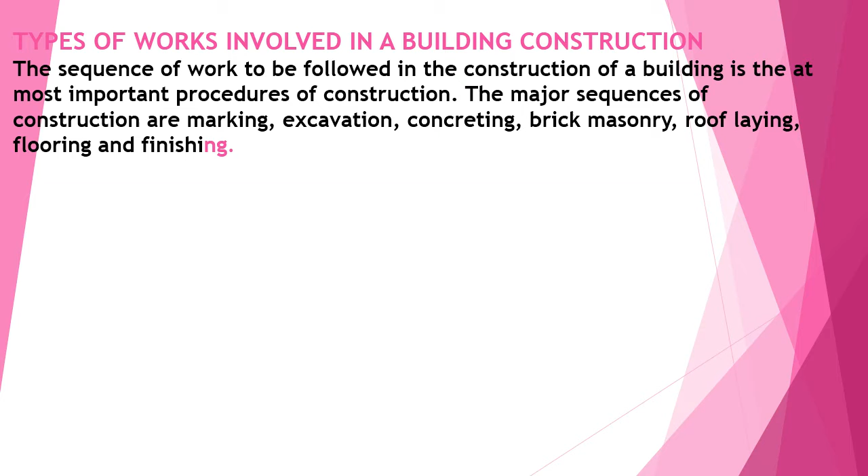The sequence of works to be followed in the construction of a building is the most important procedure of the construction. The major sequence of construction are marking, excavation, concreting, brick masonry, roof laying, flooring, and finishing.

Paperwork. Development of a private structure requires desk work before the beginning of real development. The paperwork includes readiness of drawings, estimation of material cost, work cost and possibilities, and endorsement of the drawing from the city development authorities or the concerned municipal authorities.

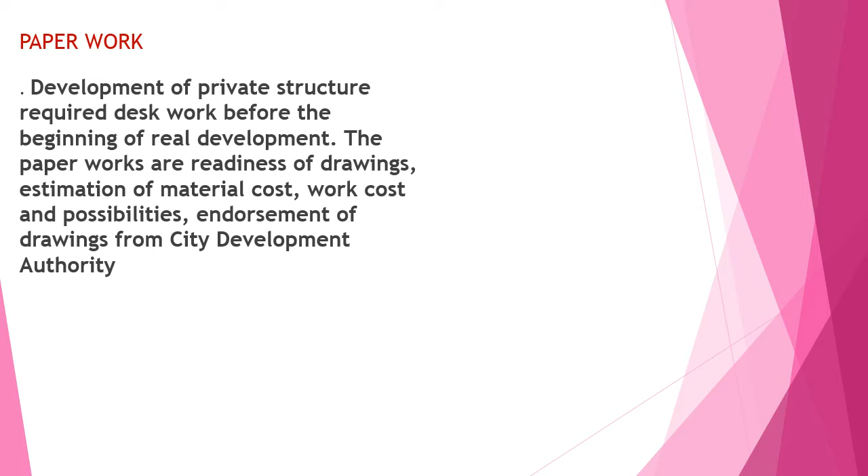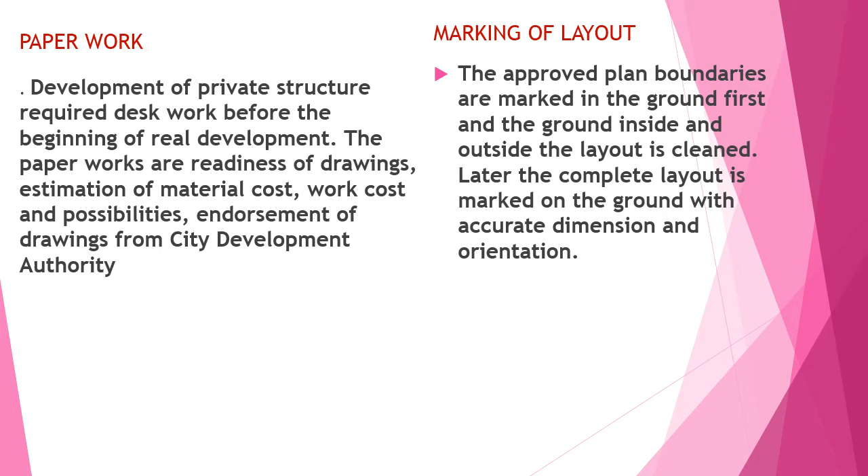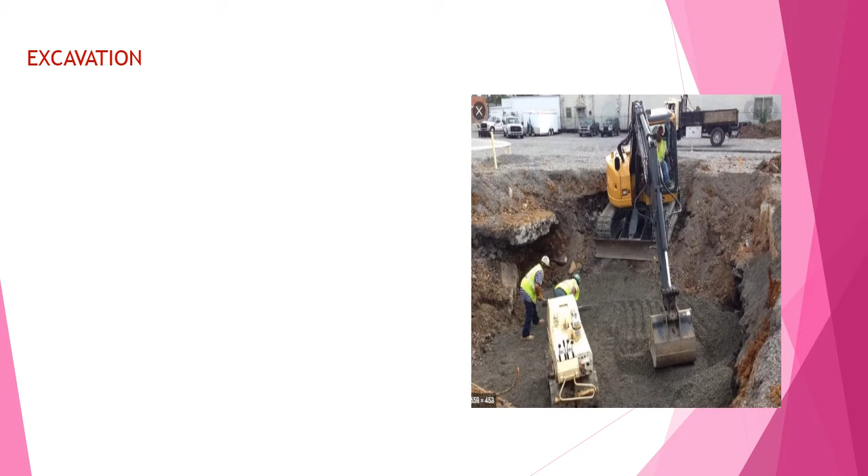Excavation. Generally, excavation is carried out for the construction of wall foundations. Excavation should be carried out as per the drawings defined with the lengths and widths. Suitable machines are used to excavate the earth for making the foundation. The adjoining image shows the equipment involved in the excavation.

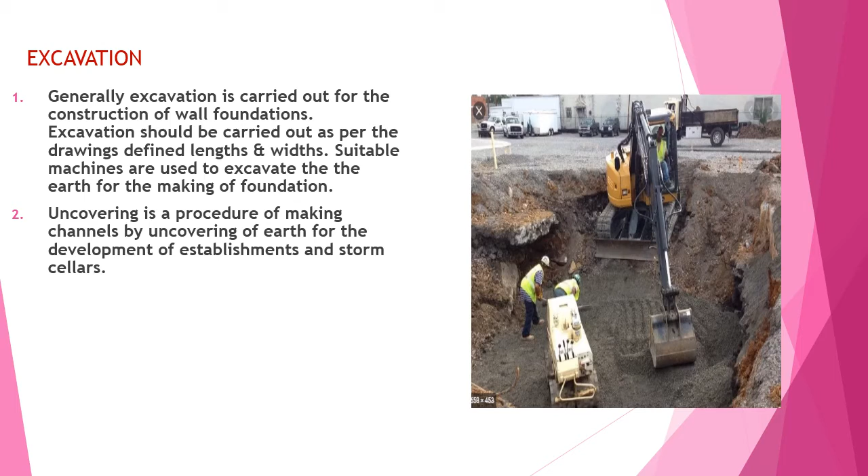Excavation is a procedure of making channels by uncovering the earth for the development of foundations and basements. Excavation is finished using a JCB or a backhoe. After the excavation, the surface is leveled, called surface dressing.

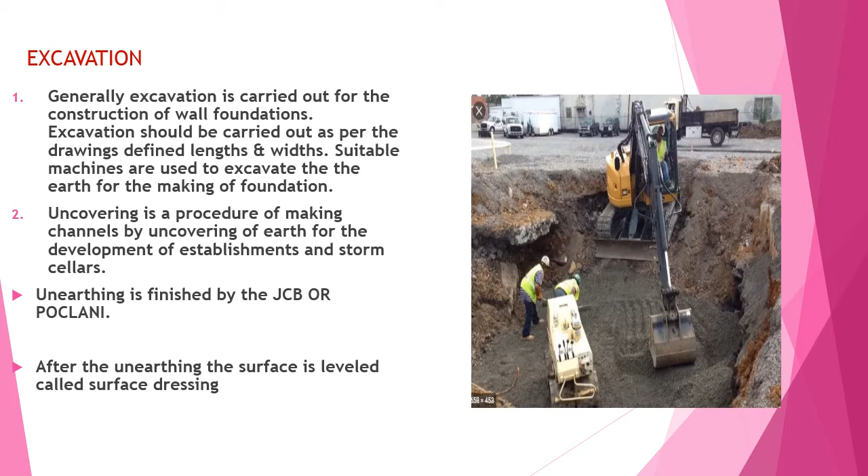Foundation work. Foundation work consists of many sub-works, which are as follows: compacting the ground. Excavation pits are trimmed and dressed as per requirement, and the bottom is compacted using hand compactors.

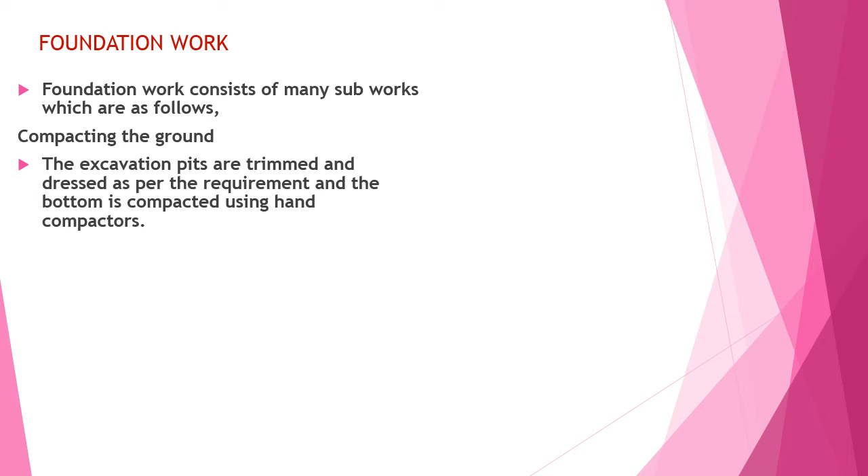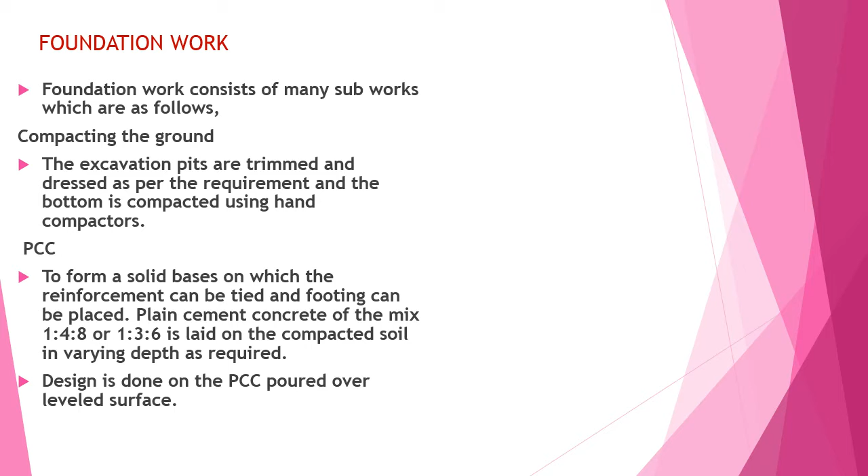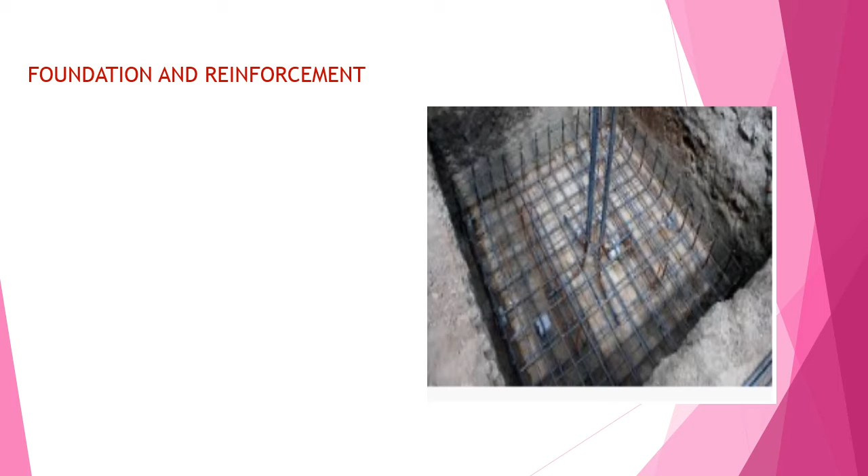Foundation and reinforcement. The adjoining image shows how the reinforcement has been tied for the foundations. Steel bars are integrated and put on the PCC, forming a skeleton in which the concrete is poured, and the column poles are taken from there. Foundation steel is then laid as per the drawings.

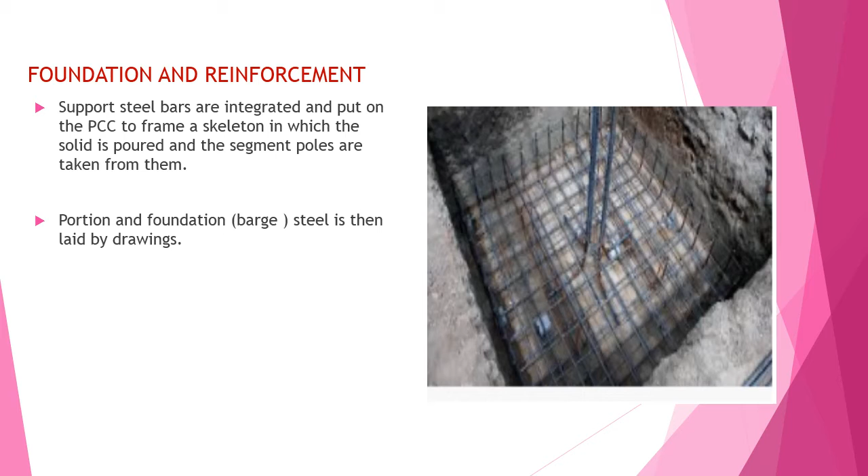Formwork. To obtain the concrete in the proper shape, desired shape and length and level, formwork has to be done. This is to be done as per the drawings.

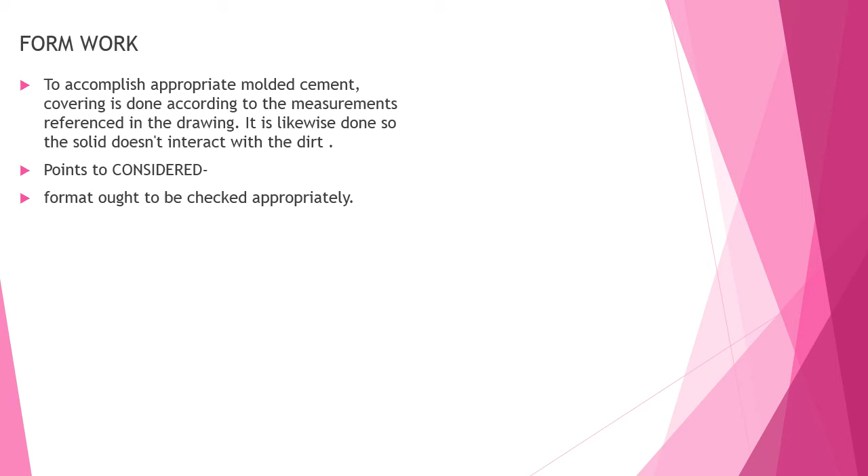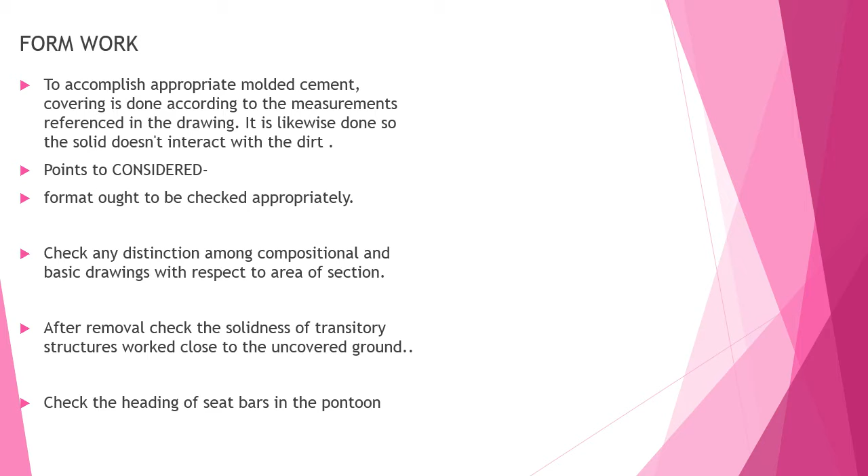Points to be considered in the formwork: the format has to be checked properly. Check any distinction among compositional and basic drawings with respect to the area of the section. After removal, check the solidness of temporary structures built close to the excavated ground. Check the heading of the bars in position. You can see the images which show how the reinforcement is tied inside the formwork.

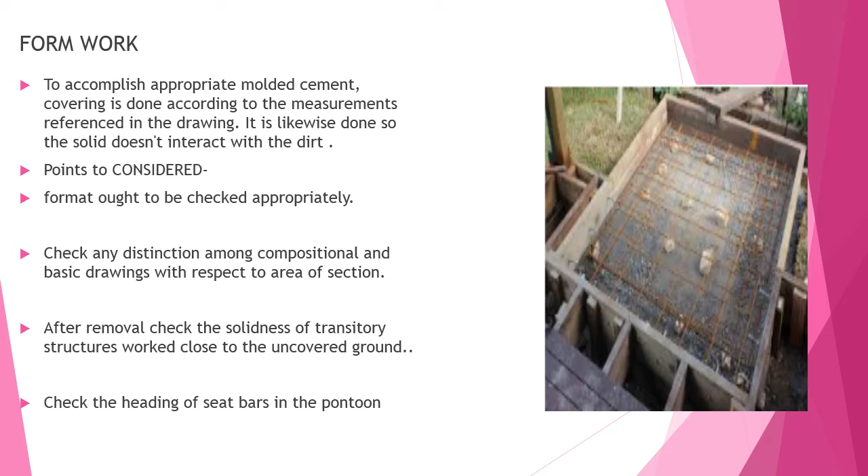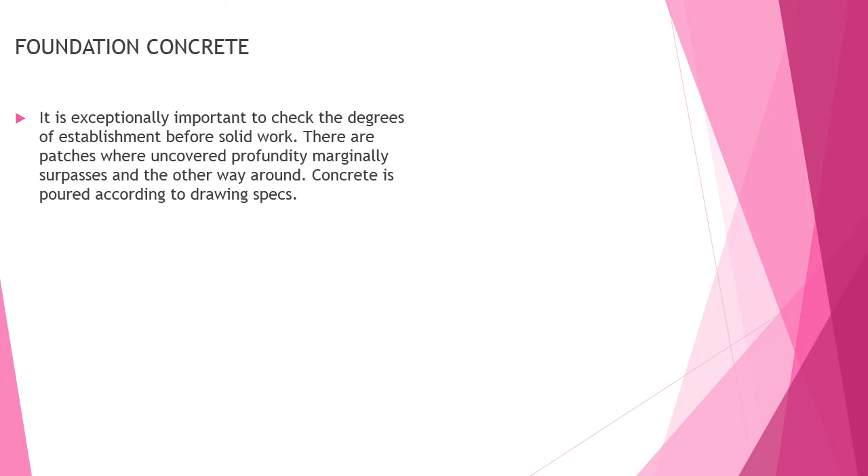Foundation concrete. It is important to check the levels of the foundation before the concrete work. There are patches where excavation is marginally deeper or shallower than required, vice versa. Concreting is poured according to the drawing specifications. This is the image of how the foundation concreting has been done.

Column casting. Casting of columns is made by fixing the shuttering formwork, and concreting is poured inside the formwork. The shuttering is usually removed after 24 hours of casting, and curing has to be carried out for a minimum period of 7 days. And the portion of the column formwork is finished.

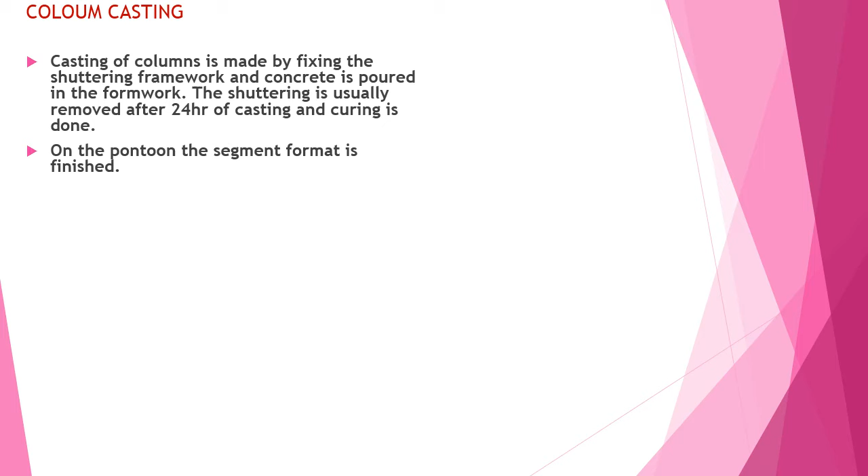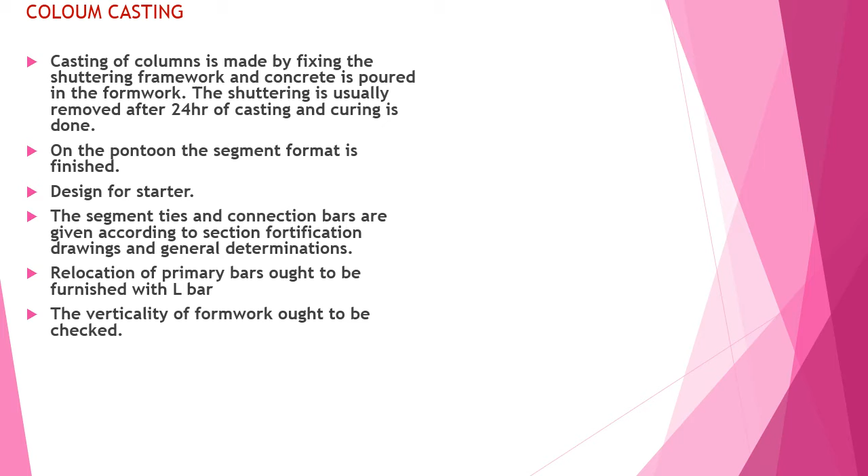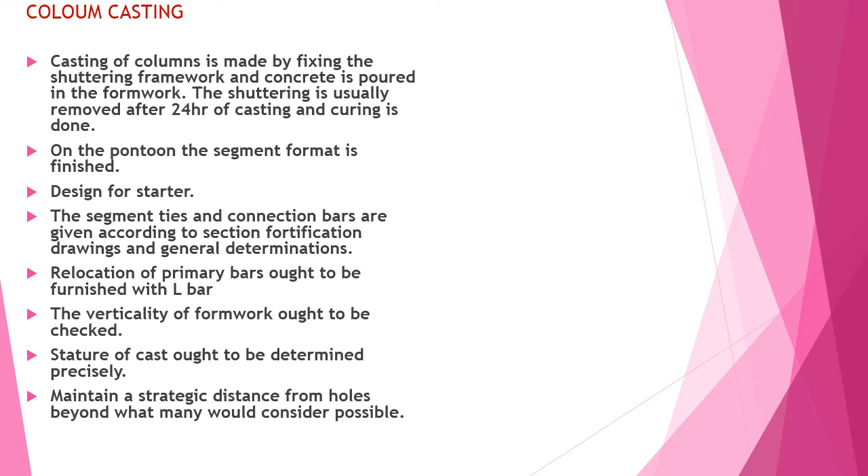Design for a starter. The column ties and connection bars are given according to the section reinforcement drawings and general specifications. Placement of primary bars ought to be furnished with L bar. The verticality of the formwork ought to be checked. Stature of cast ought to be determined precisely. Maintain a strategic distance from gaps beyond what is considered possible.

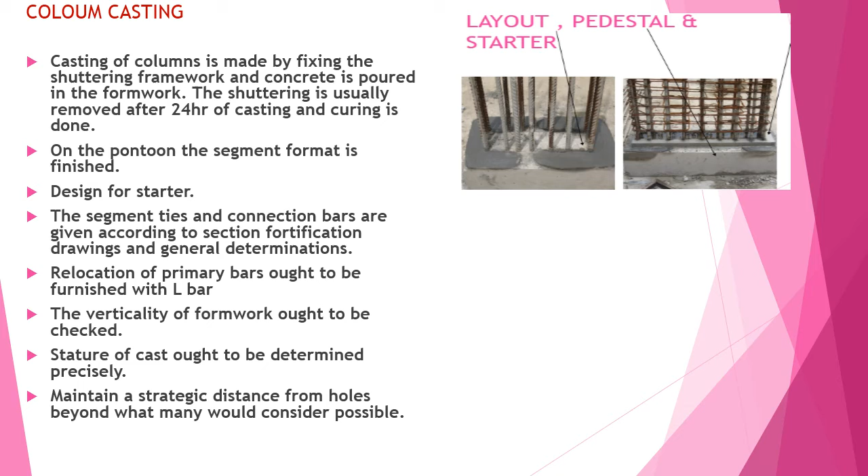This is the way a layout for a starter and pedestal has been erected. This is the way column casting has been done and cured properly.

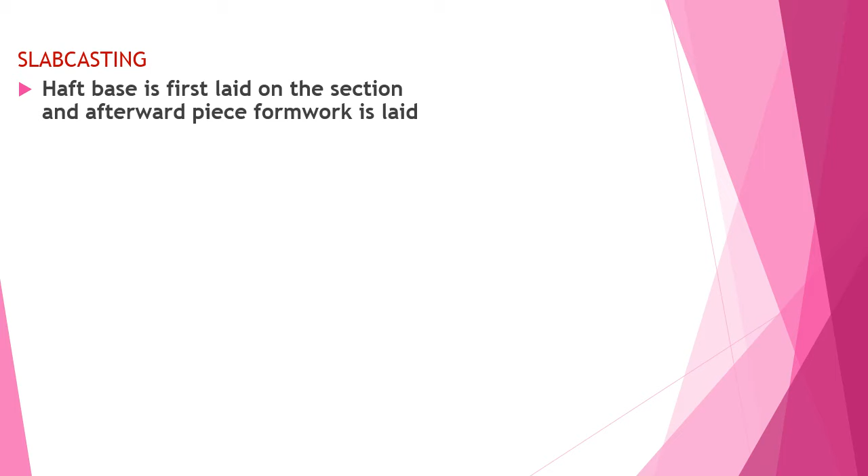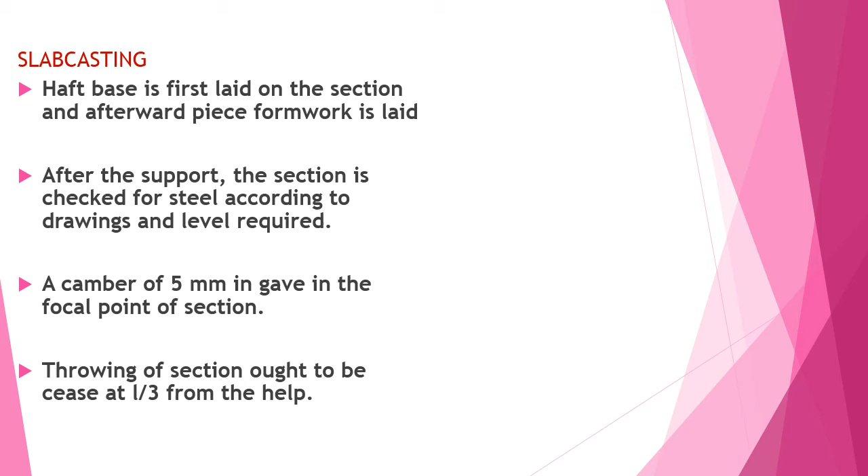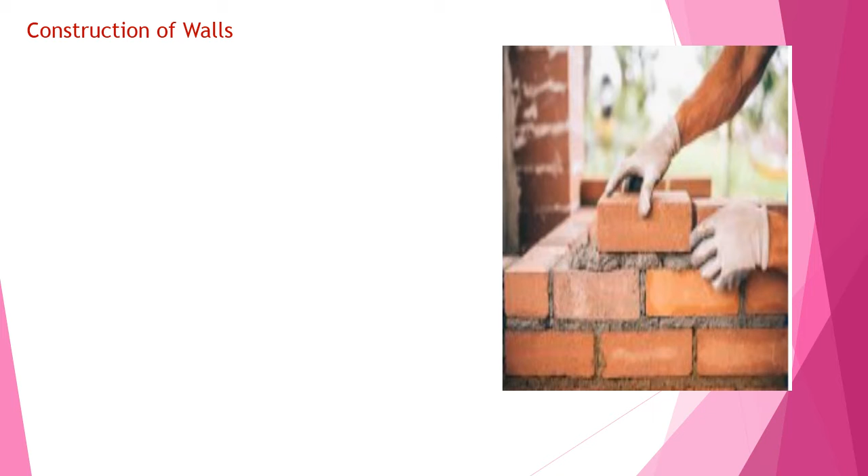Construction of the walls. Walls are constructed using many materials such as bricks, blocks, precast concreting and many others. Before starting the wall construction, the base of the wall is constructed first using concreting or size stone masonry to avoid any capillary action. The height of the wall depends upon the floor height. Necessary openings are given for doors, windows and ventilators.

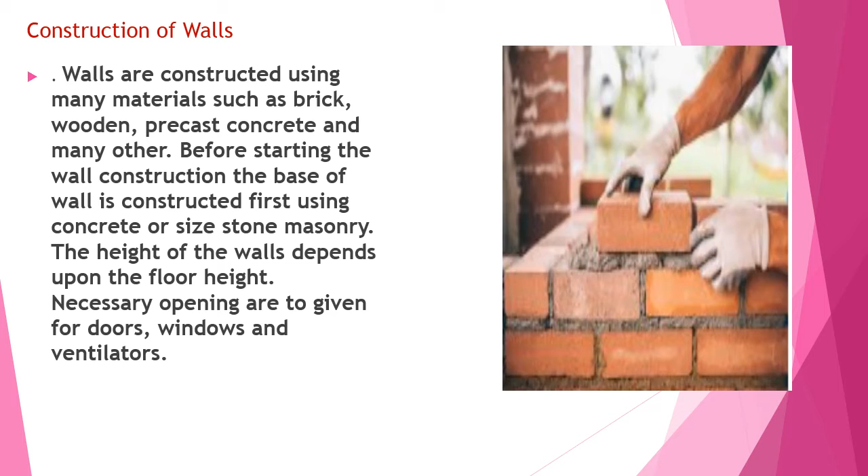Lintel beams. Masonry work of the building is carried out in one go till the roof. Openings for windows and doors are left during masonry works. Reinforced cement concrete beams are laid down on top of the opening, so that load of the structure above openings does not directly come onto the door frames. See the images which show how the lintel beams are cast on top of the doors and windows.

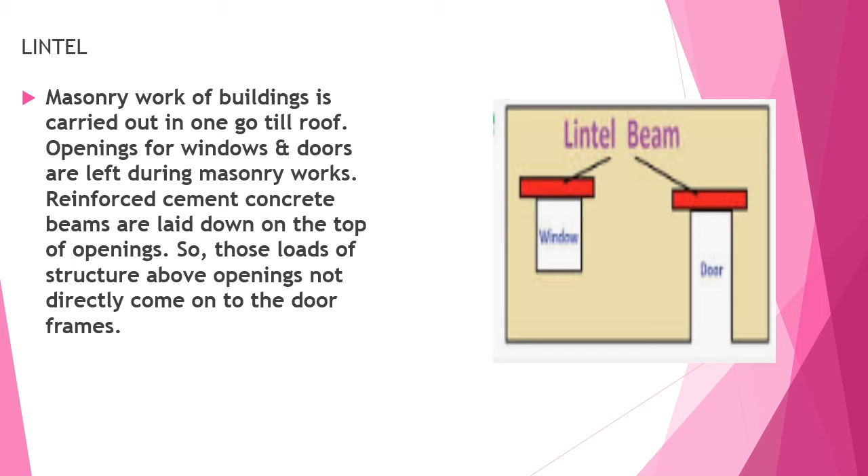Plastering. Formwork is removed after 14 days of slab pouring. Now plaster work can be started. Mortar of the plaster work can be 1:3 or 1:4. Thickness of the plaster is not more than 0.75 inch. Cure the surface for about 7 days so that the plaster gains the necessary strength.

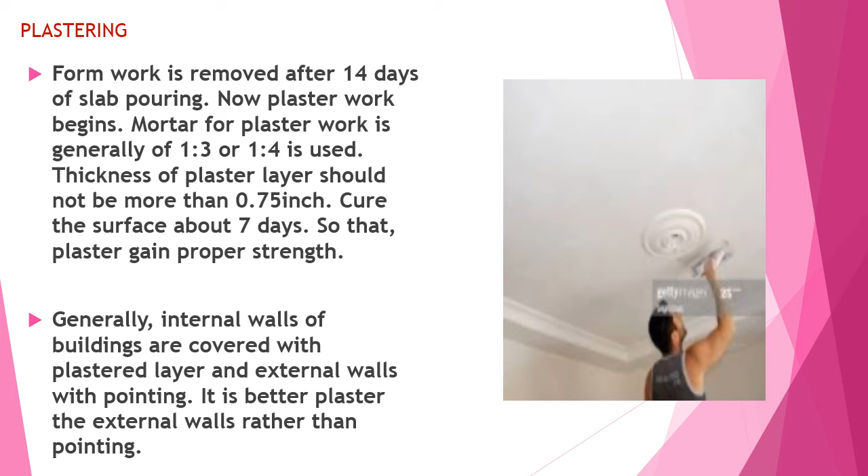Generally, internal walls of buildings are covered with a plastered layer and external walls with pointing. It is better to plaster the external walls rather than pointing.

Fixing doors and windows. Customarily, doors and windows of wood are utilized. However, steel and aluminium are also an available choice. In the case of wooden doors and windows, frames are fixed in the walls during the masonry work.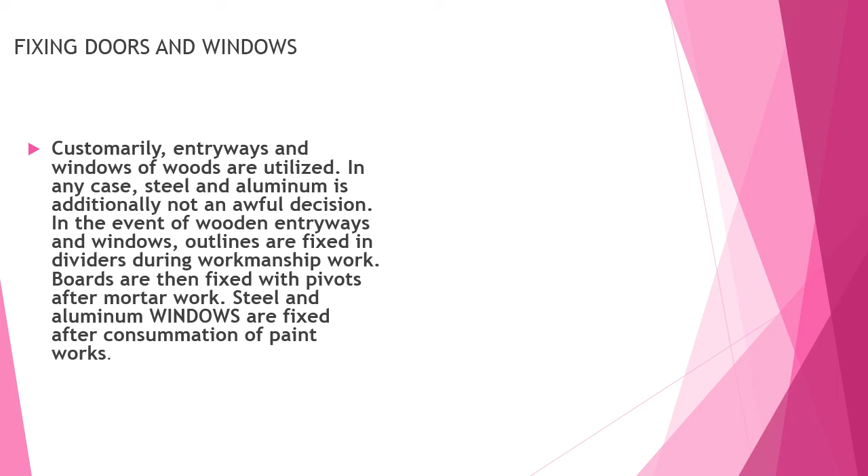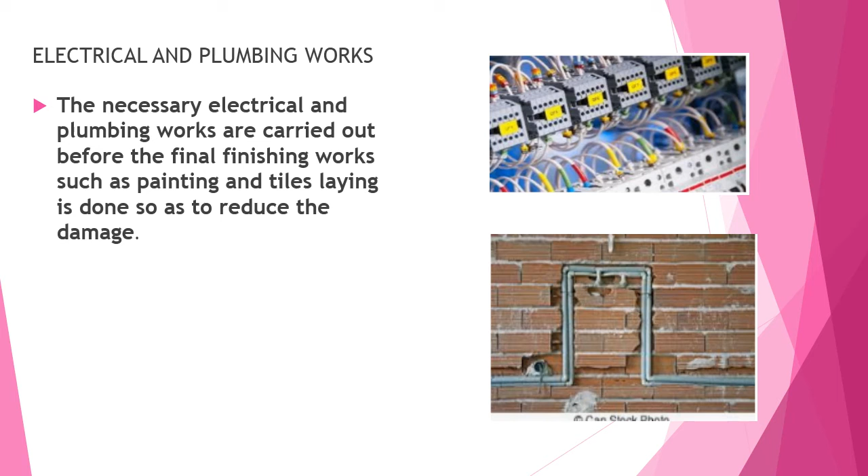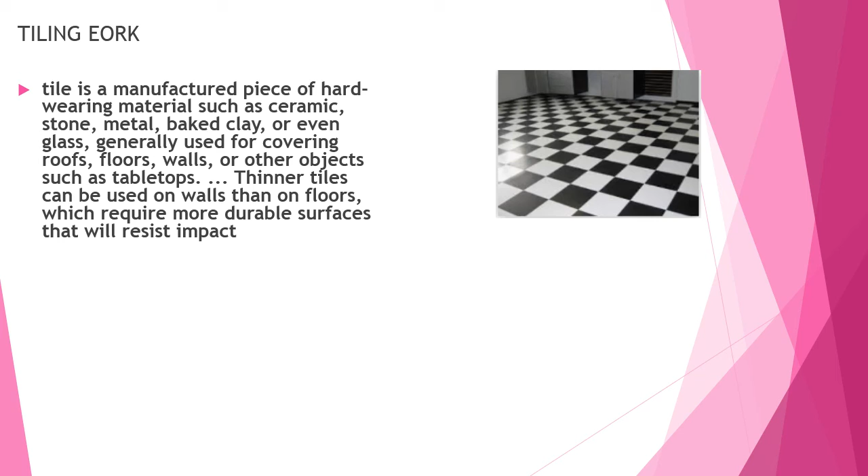Tiling work. Tile is a manufactured piece of hard wearing material such as ceramic, stone, metal, baked clay, or even glass, generally used for covering roofs, floors, walls, or other objects such as tabletops. Thinner tiles can be used on walls than on floors, which require more durable surfaces that will resist impact. Majority of tiles are laid in the bathrooms and kitchen area.

First the wall tiles are fixed, after which the floor tiles are fixed. For flooring works, granite, marble, tiles, and epoxy are also used. These images will show you how the tilings and the paver blocks are fixed in a building.

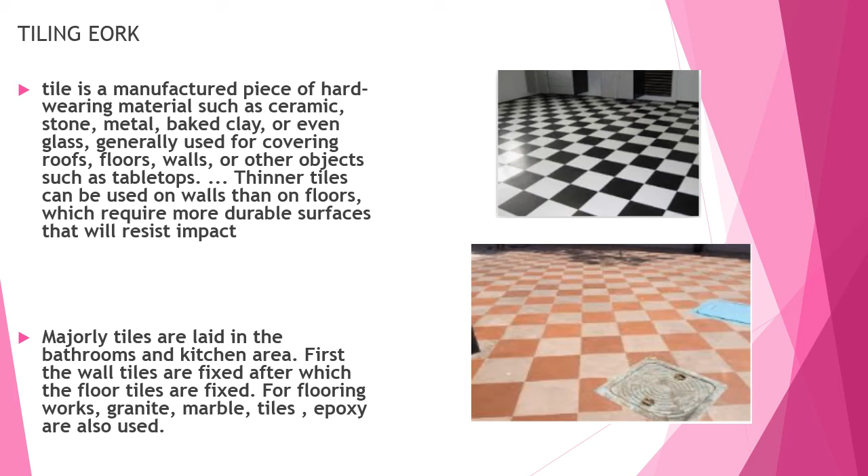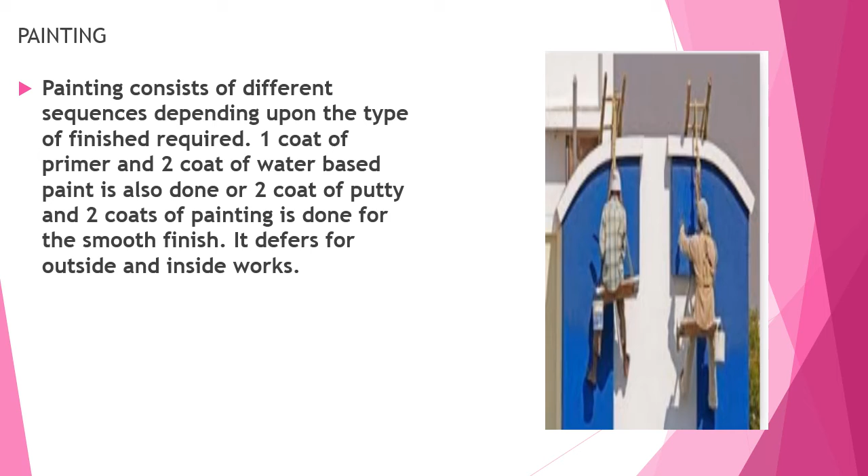Painting. Painting consists of different sequences depending upon the type of finish you require. It might be 1 coat of primer and 2 coats of water-based paint, also 2 coats of putty and 2 coats of painting. It is dependent upon the customer's requirement, and differs for outside and inside works. The images of the painting that has been carried out have been shown.

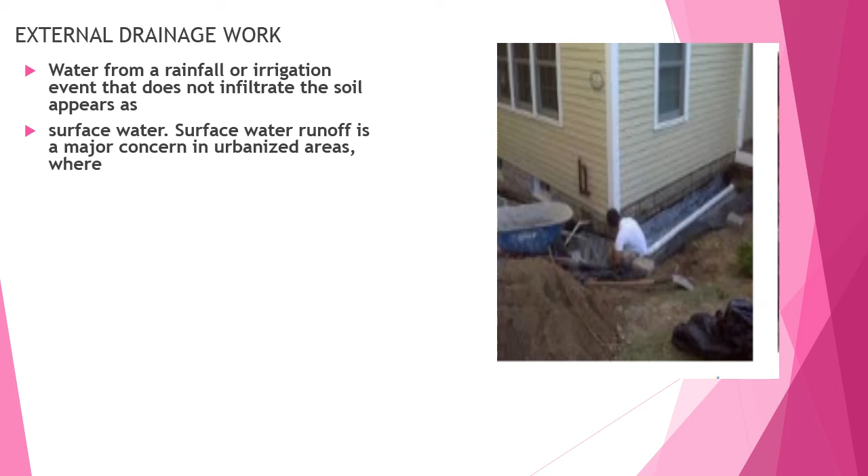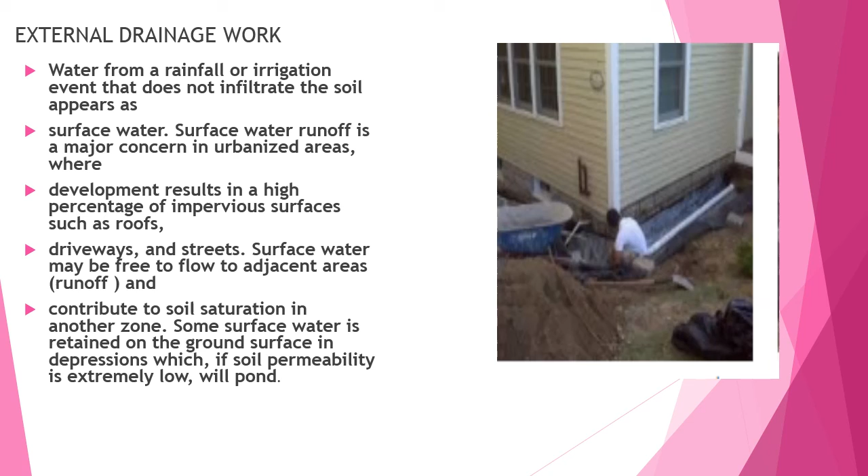External drainage works. Water from rainfall or irrigation that does not infiltrate the soil appears as surface water. Surface water is a major concern in urbanized areas where development results in a high percentage of impervious surfaces such as roofs, driveways, and streets. Surface water may be free to flow in adjoining areas and contribute to soil saturation in another zone. Some surface water is retained on the ground surface in depressions, which, if soil permeability is extremely low, will pond. The adjoining image shows how external drainage works have been carried out.